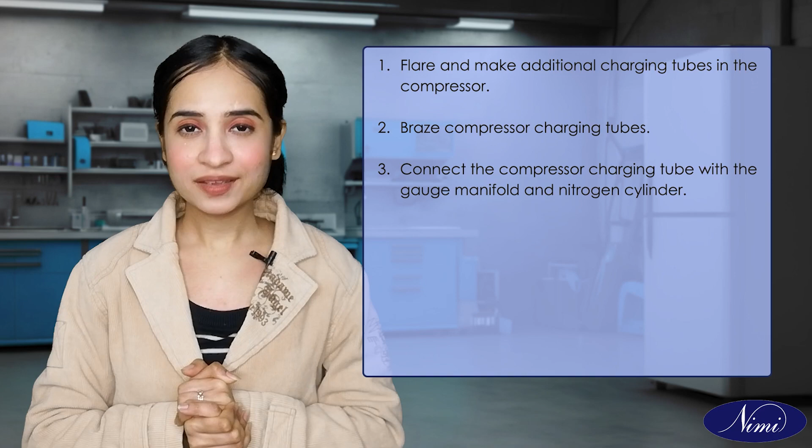In the last video, we discussed how to flare and make additional charging tubes in the compressor, braze the compressor charging tubes, connect the compressor charging tube with the gauge manifold and nitrogen cylinder, charge nitrogen gas into the system, test the leak with a soap solution, and braze the leak spots, then connect the system with a vacuum pump.

In continuation, in this video we are going to discuss how to do evacuation, gas charging, and finally pinching the copper tube. We will handle and operate the vacuum pump, dehydrate the system, evacuate the system on both the high and low sides, charge gas into the system, and pinch the system.

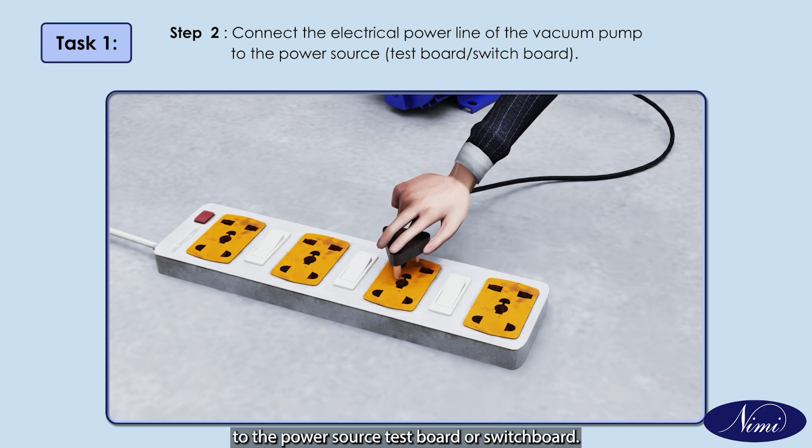Task 1: Handle and operate the vacuum pump. Step 1: Ensure that electrical power supply is available to the vacuum pump by using an online tester. Step 2: Connect the electrical power line of the vacuum pump to the power source, test board or switchboard. Step 3: Switch on the vacuum pump.

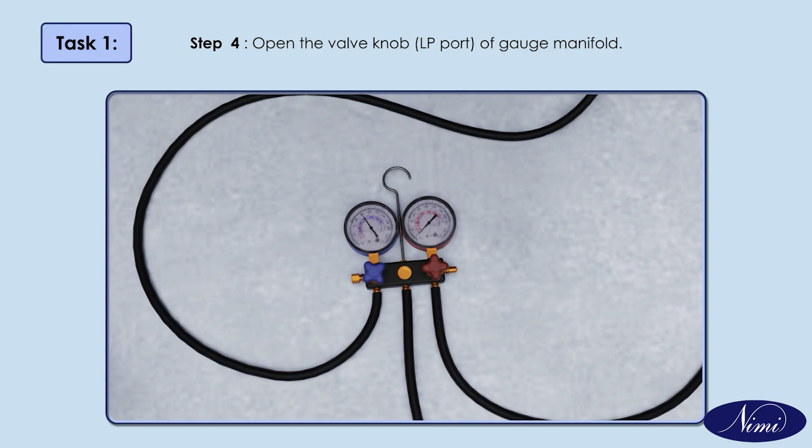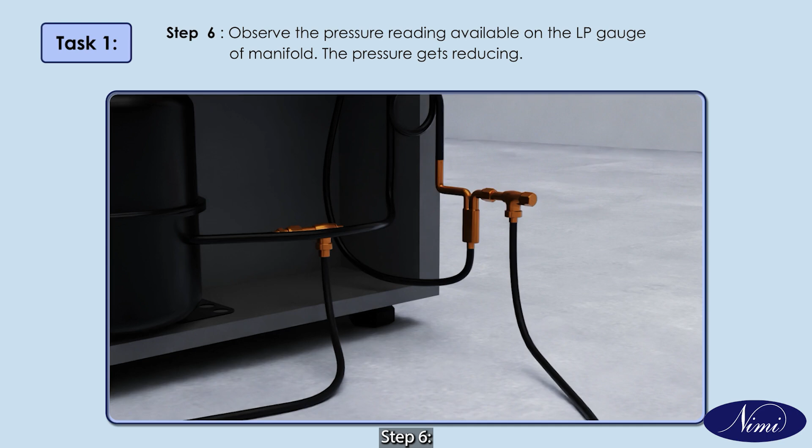Step 4: Open the valve knob of the LP port of the gauge manifold. Step 5: Open the angle valve by turning the stem anti-clockwise with a ratchet key or wrench. Step 6: Observe the pressure reading on the LP gauge of the manifold. The pressure gets reducing. Step 7: Leave the system as it is for 2 hours without any interruption.

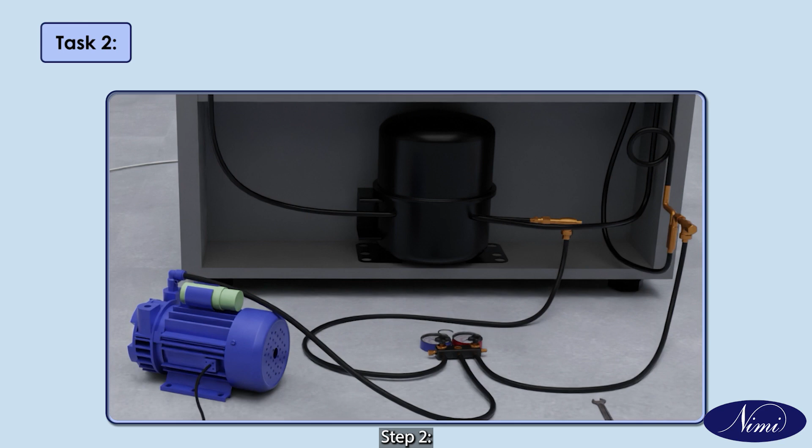Task 2: Dehydrate the system. Step 1: Take the heating kit infrared lamp and switch it on. Step 2: Make sure that the system is getting vacuum and the pump is functioning. Step 3: Heat all over areas of the system with the infrared lamp. Step 4: Apply heat uniformly to all areas.

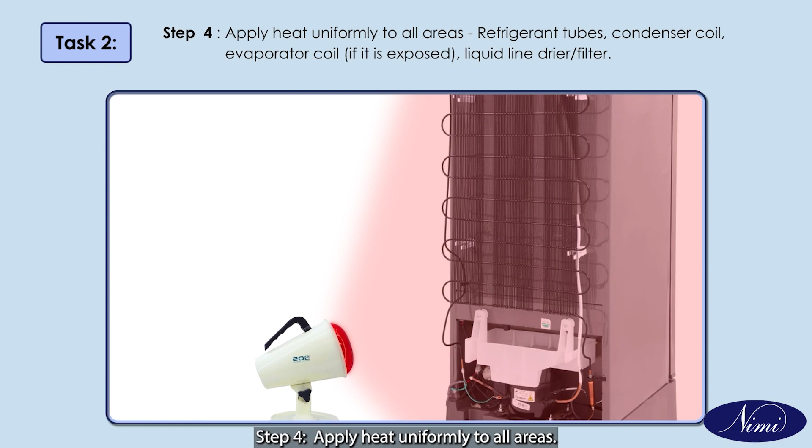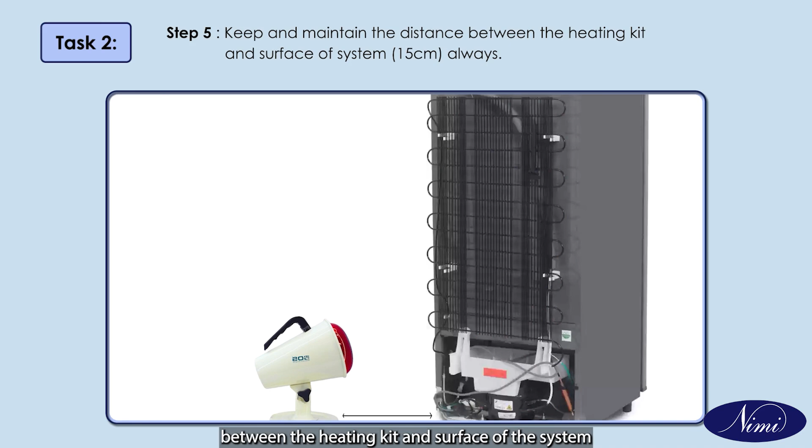Apply heat to the refrigerant tubes, condenser coil, evaporator coil if it is exposed, and liquid line drier or filter. Step 5: Keep and maintain the distance between the heating kit and the surface of the system at 15 cm always. Step 6: Continue the process for 15 to 30 minutes.

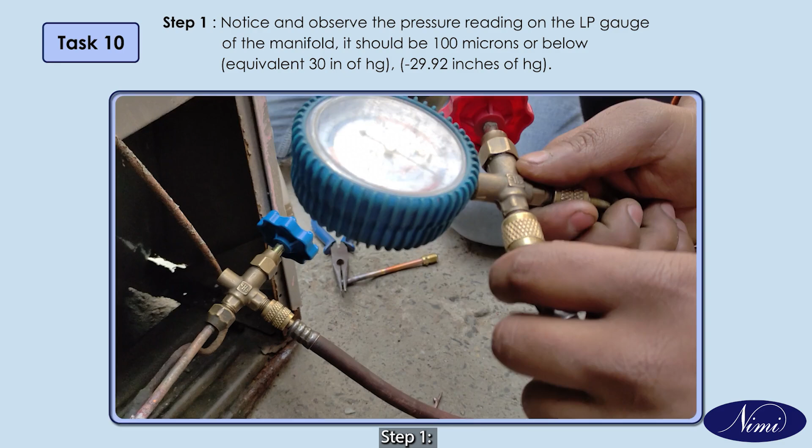Task 10: Evacuate the system. Step 1: Notice and observe the pressure reading on the LP gauge of the manifold. It should be 100 microns or below, equivalent to 30 inches of Hg.

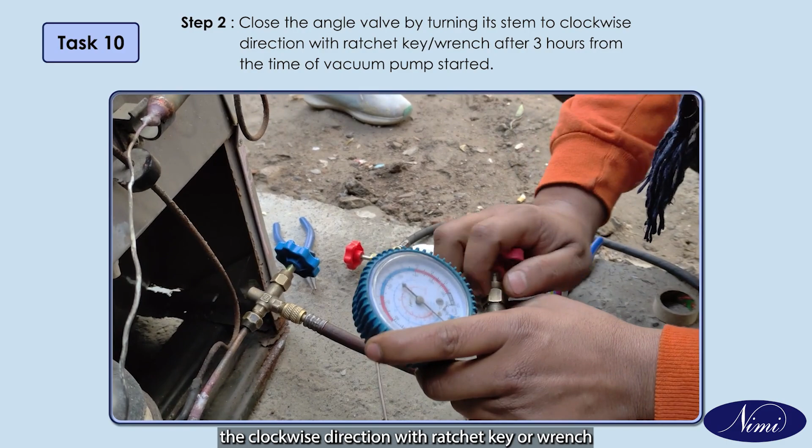Step 2: Close the angle valve by turning the stem clockwise with a ratchet key or wrench after 3 hours from the time the vacuum pump started. Step 3: Close the LP knob of the gauge manifold. Step 4: Switch off the vacuum pump and disconnect the power supply.

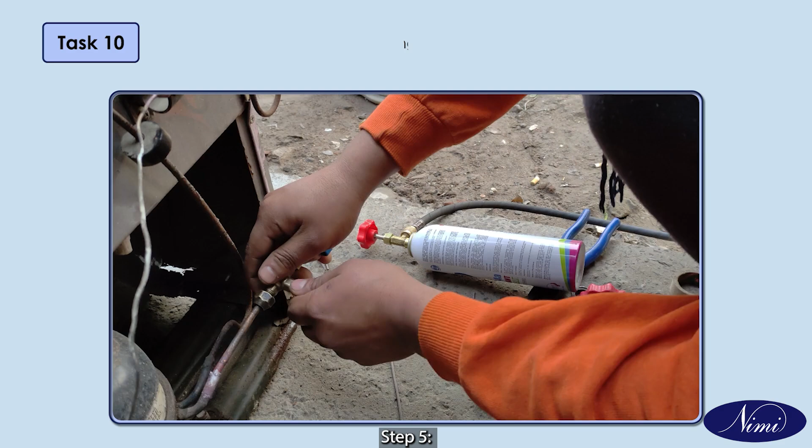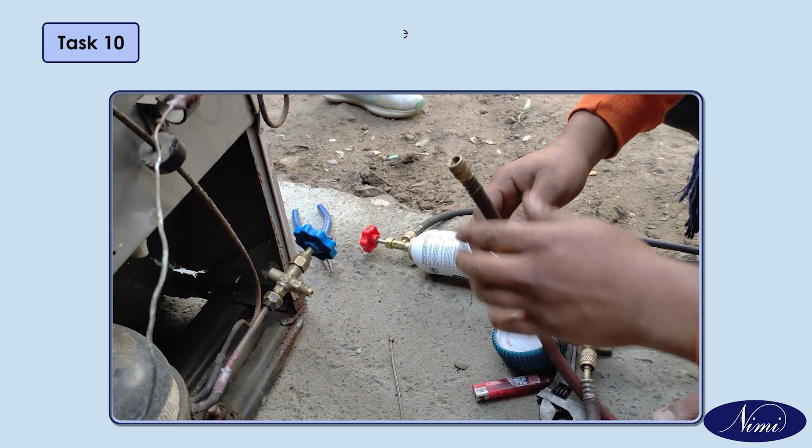Step 5: Disconnect charging hose 1 from the angle valve. Step 6: Close the outlet of the angle valve with a 6 mm dummy nut and tighten the nut with a suitable size double-ended spanner. Step 7: Disconnect charging hoses 1 and 2 from the gauge manifold and vacuum pump.

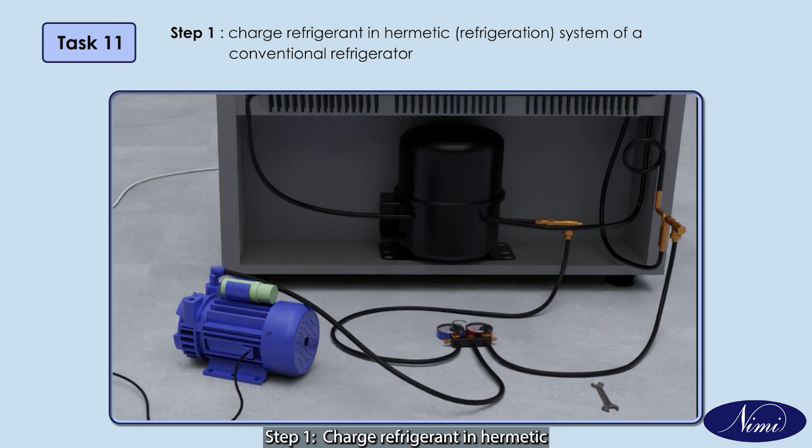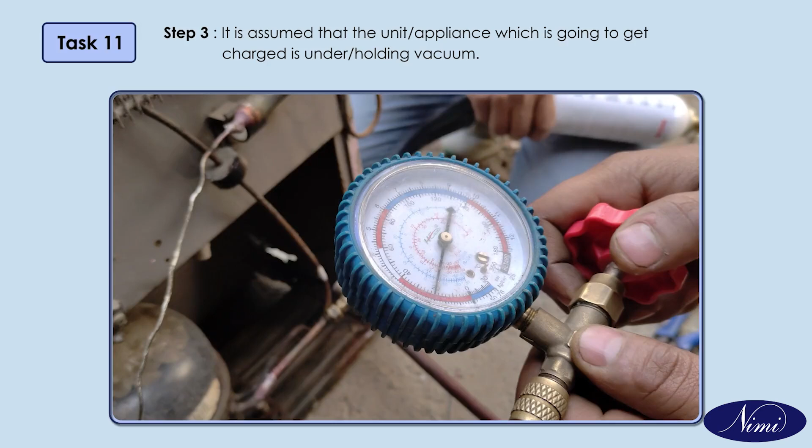Task 11: Gas charging the system. Step 1: Charge refrigerant in the hermetic refrigeration system of a conventional refrigerator. Step 2: Charge refrigerant in the hermetic refrigeration system of a frost-free refrigerator. Step 3: It is assumed that the unit or appliance to be charged is holding vacuum. Task 12: Connect the system to the charging cylinder.

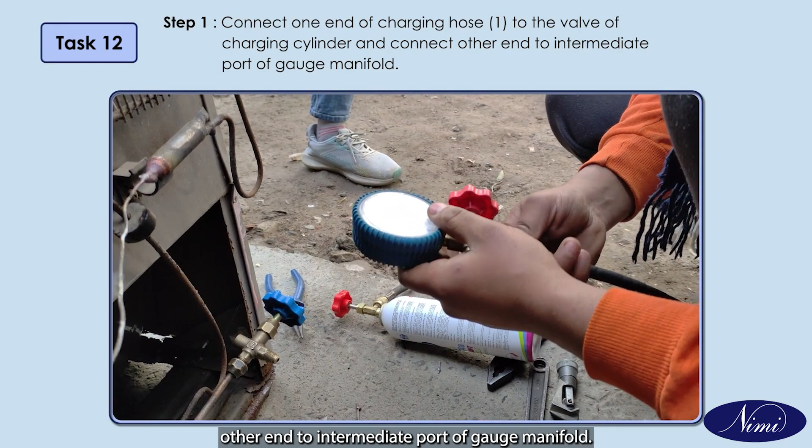Step 1: Connect one end of charging hose 1 to the valve of the charging cylinder and the other end to the intermediate port of the gauge manifold. Step 2: Connect one end of charging hose 2 to the angle valve of the compressor and the other end to the low pressure LP port of the gauge manifold.

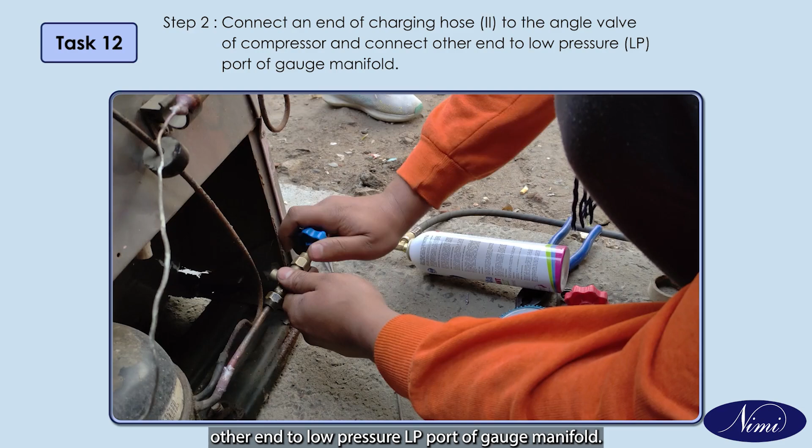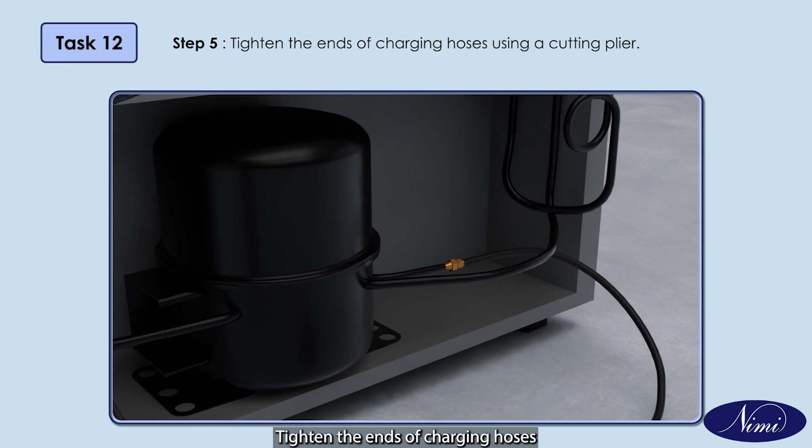Step 3: Close the high pressure HP port of the gauge manifold with a 6 mm flare dummy nut and tighten it using a suitable double-ended spanner. Step 4: Ensure that the charging cylinder valve, LP and HP valve knobs of the gauge manifold, and compressor angle valves are closed. Step 5: Tighten the ends of the charging hoses using a cutting plier.

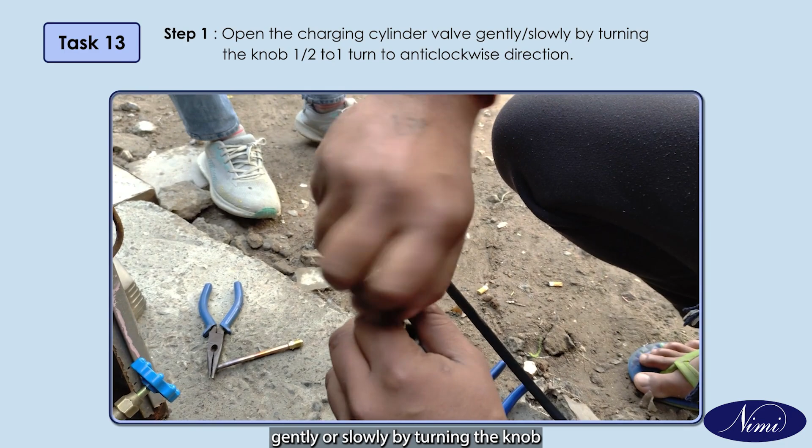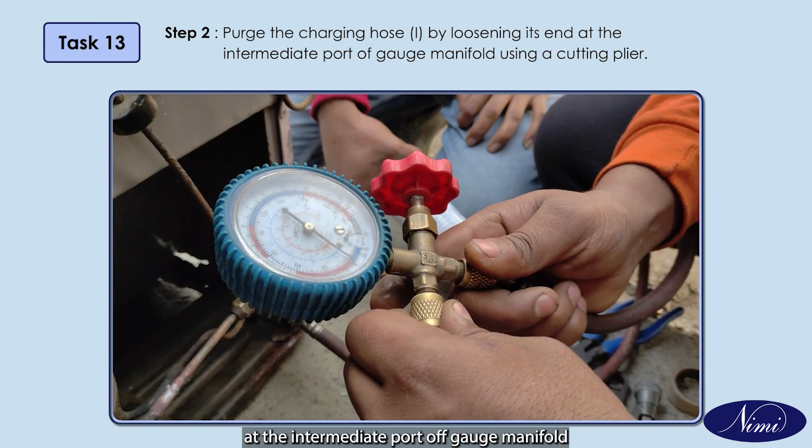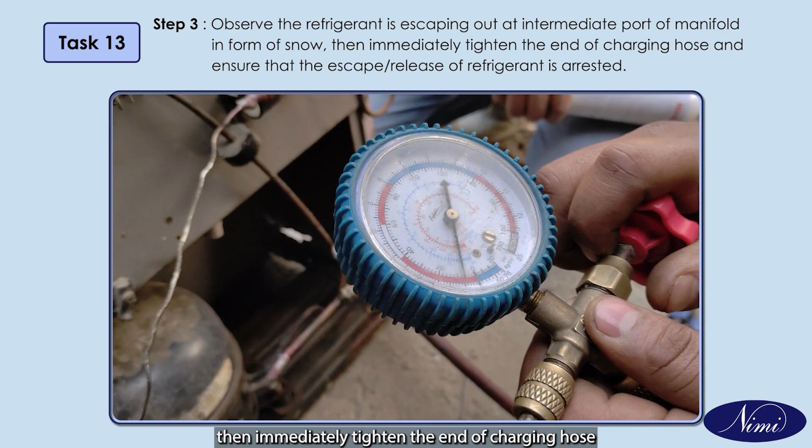Task 13: Purge air in the charging hoses. Step 1: Open the charging cylinder valve gently by turning the knob half to one turn anti-clockwise. Step 2: Purge charging hose 1 by loosening its end at the intermediate port of the gauge manifold using a cutting plier. Step 3: Observe the refrigerant escaping at the intermediate port in the form of snow, then immediately tighten the end of the charging hose to arrest the release of refrigerant. Step 4: Open the LP knob of the gauge manifold 2 to 3 turns and observe the reading on the LP gauge.

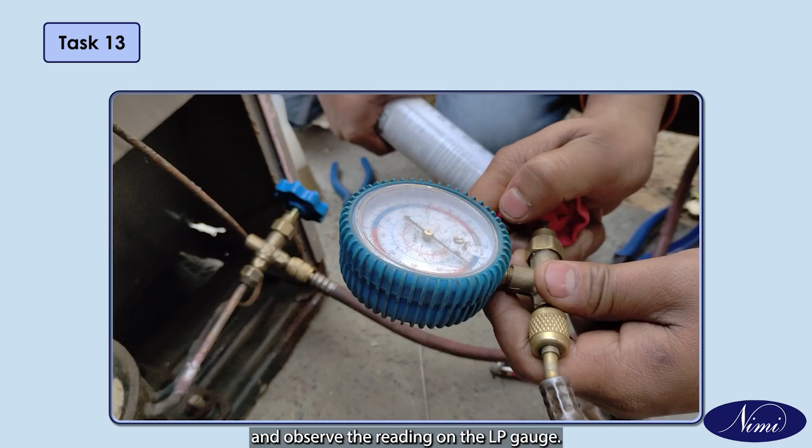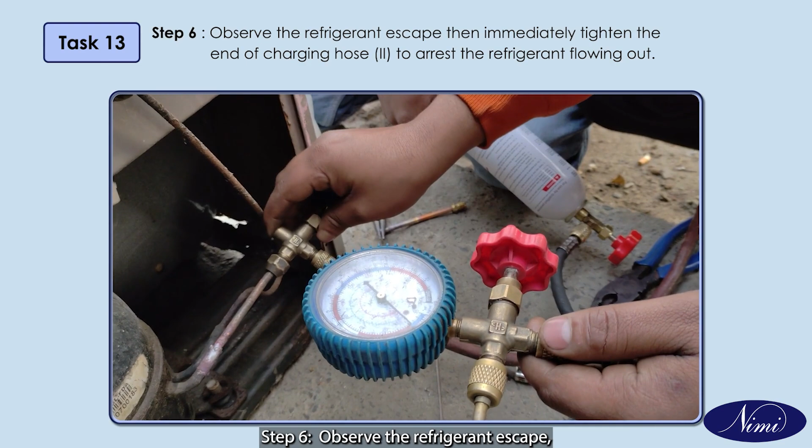Step 5: Purge charging hose 2 by loosening its end at the angle valve using a cutting plier. Step 6: Observe the refrigerant escape, then immediately tighten the end of charging hose 2 to arrest the refrigerant flowing out.

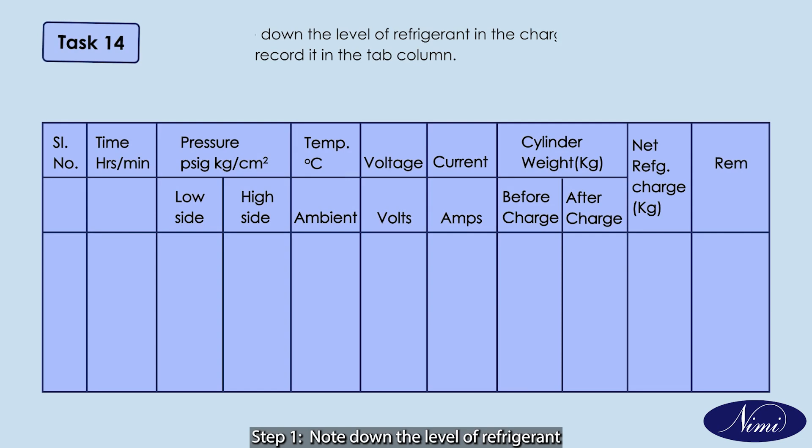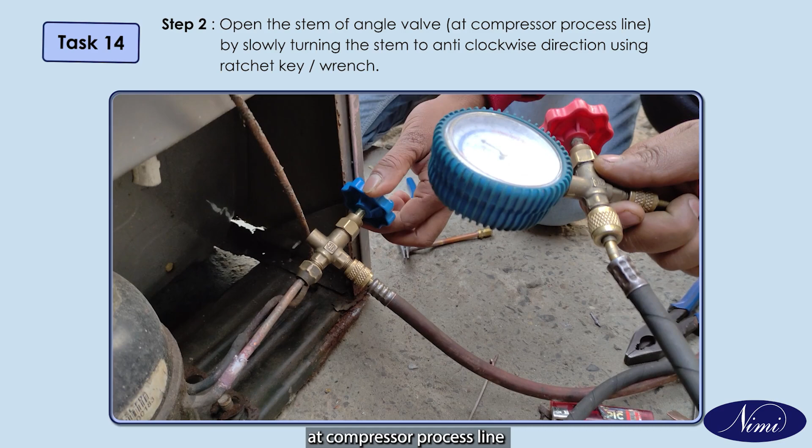Task 14: Charge refrigerant into the system. Step 1: Note down the level of refrigerant in the charging cylinder and record it in the tab column. Step 2: Open the stem of the angle valve at the compressor process line by slowly turning it anti-clockwise using a ratchet key or wrench.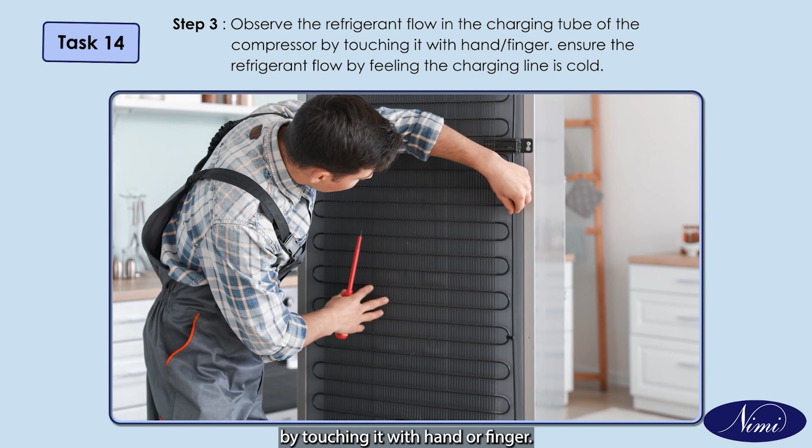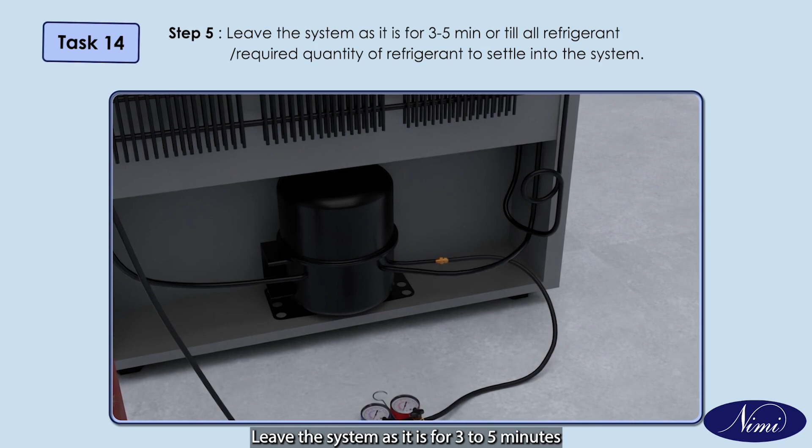Step 3: Observe the refrigerant flow in the charging tube of the compressor by touching it with the hand or finger, ensuring the refrigerant flow by feeling the charging line is cold. Step 4: Observe the refrigerant flow or transfer by watching the level in the charging cylinder. Step 5: Leave the system as it is for 3 to 5 minutes or until all refrigerant or the required quantity settles into the system.

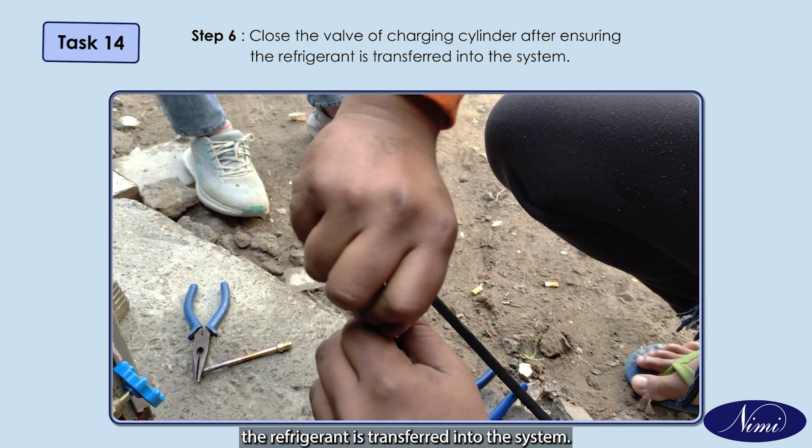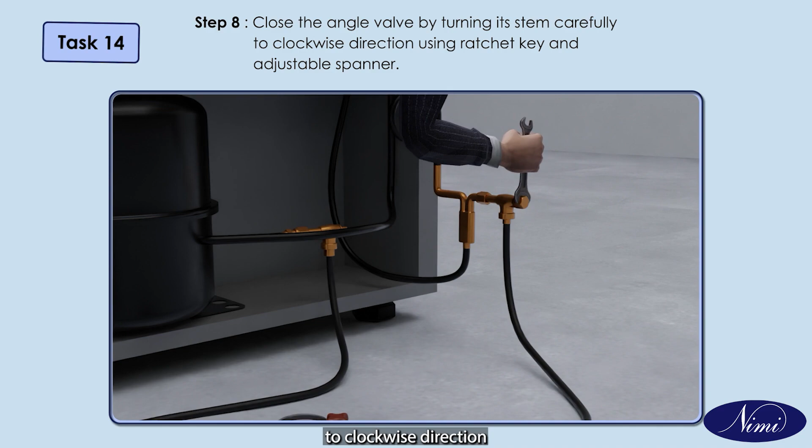Step 6. Close the valve of the charging cylinder after ensuring the refrigerant is transferred into the system. Step 7. Close the LP knob of the gauge manifold by turning the knob clockwise using hand. Step 8. Close the angle valve by turning its stem carefully clockwise using a ratchet key and adjustable spanner.

Step 9. Observe and record the reading on the charging cylinder to calculate the amount of refrigerant charged. Step 10. Disconnect charging hose 2 from the angle valve.

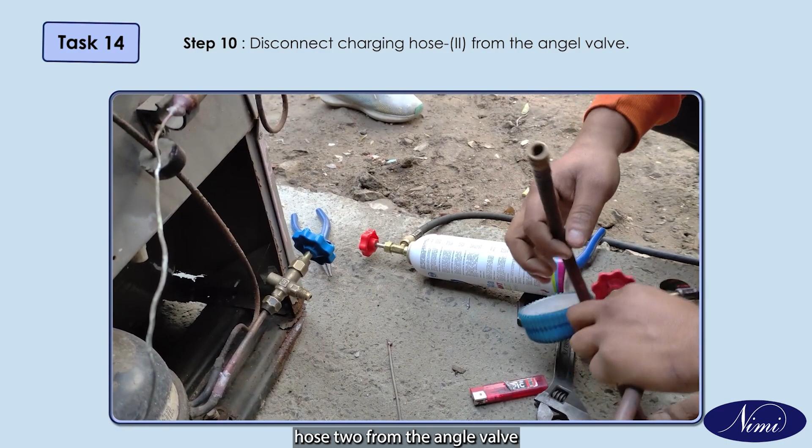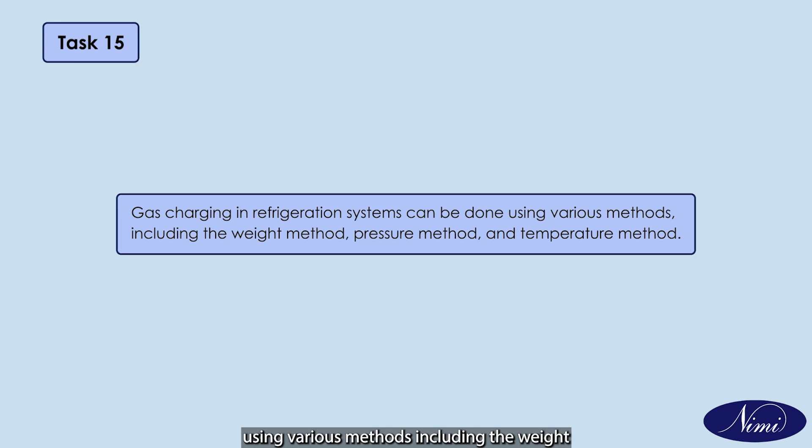Task 15. Connect system to service cylinder. Gas charging in refrigeration systems can be done using various methods including the weight method, pressure method, and temperature method.

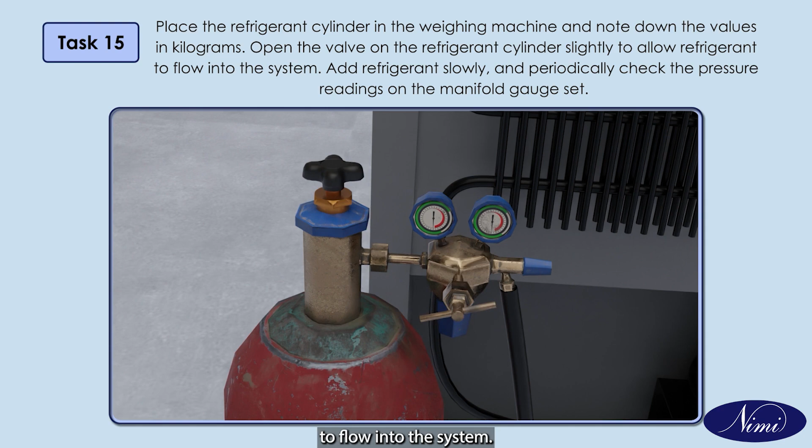Place the refrigerant cylinder on the weighing machine and note down the values in kilograms. Open the valve on the refrigerant cylinder slightly to allow refrigerant to flow into the system. Add refrigerant slowly and periodically check the pressure readings on the manifold gauge set.

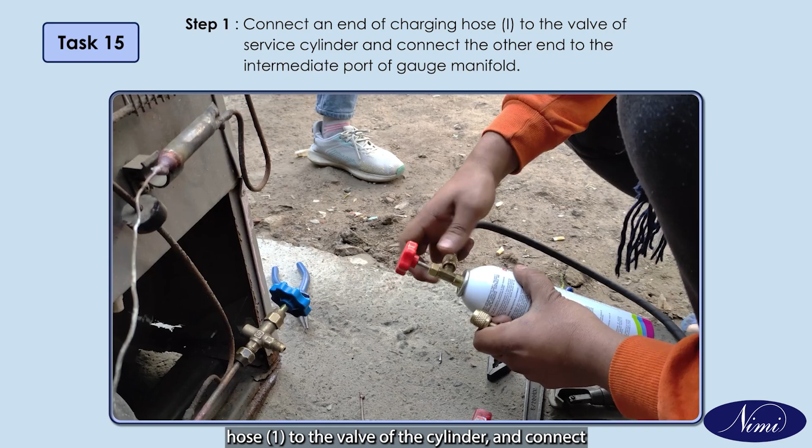Step 1. Connect one end of charging hose 1 to the valve of the service cylinder and connect the other end to the intermediate port of the gauge manifold. Step 2. Connect one end of charging hose 2 to the angle valve of the compressor and connect the other end to the low pressure LP port of the gauge manifold.

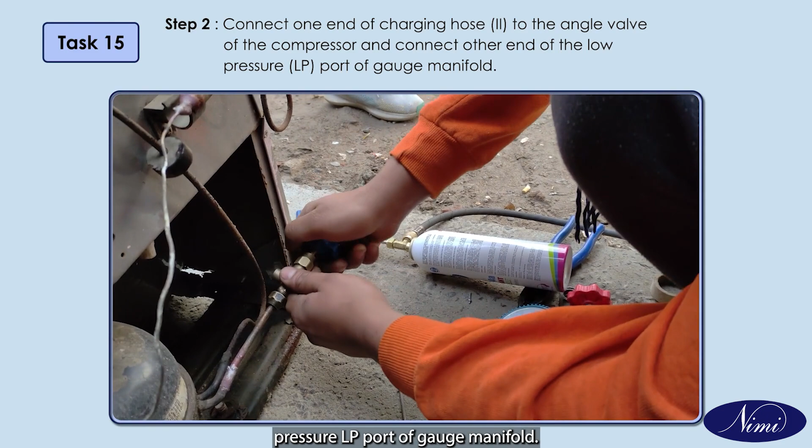Step 3. Close the high pressure HP port of the gauge manifold with a flare dummy nut of 6 mm and tighten it using a suitable double-ended spanner.

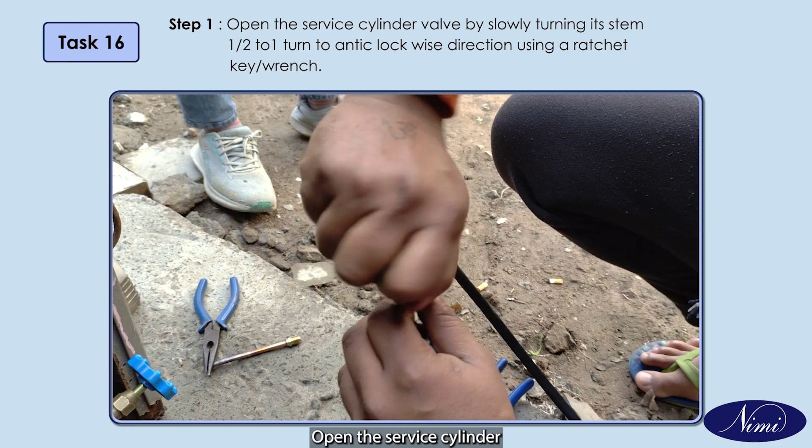Task 16. Purge air in the charging hoses. Step 1. Open the service cylinder valve by slowly turning its stem 1/2 to 1 turn in the anti-clockwise direction using a ratchet key or wrench.

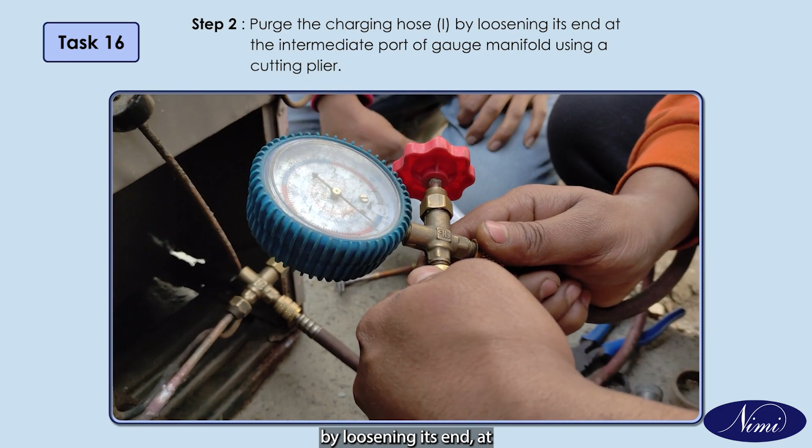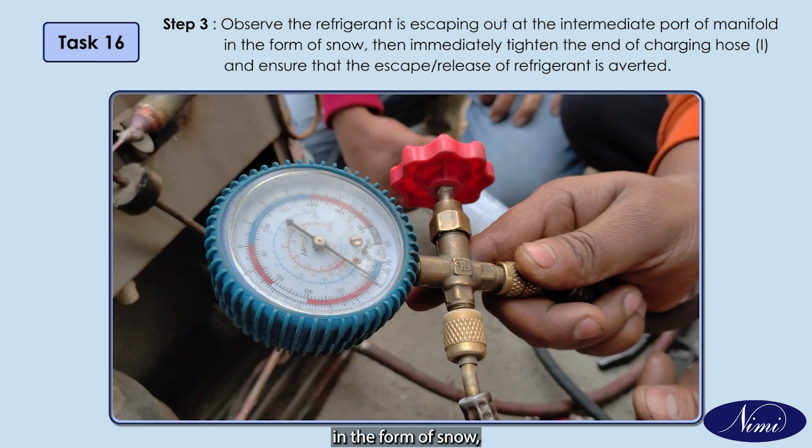Step 2. Purge charging hose 1 by loosening its end at the intermediate port of the gauge manifold using a cutting plier. Step 3. Observe the refrigerant escaping at the intermediate port of the manifold in the form of snow. Then immediately tighten the end of charging hose 1 and ensure the escape or release of refrigerant is averted.

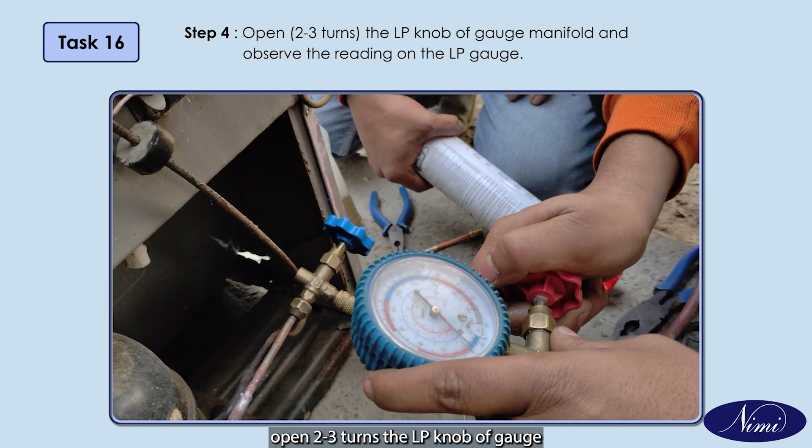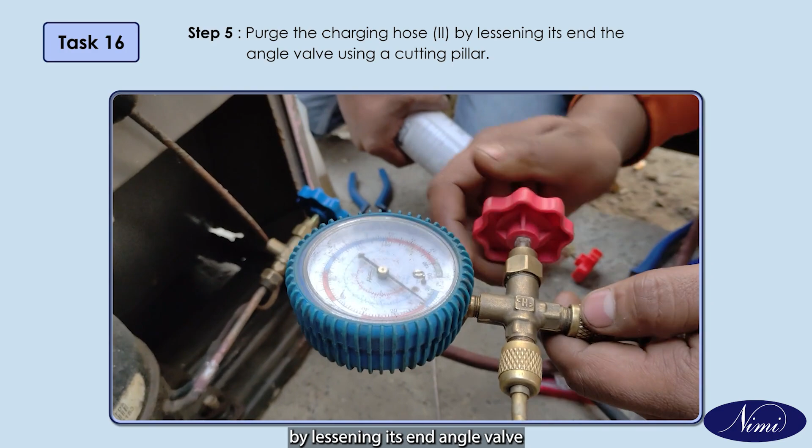Step 4. Open the LP knob of the gauge manifold 2 to 3 turns and observe the reading on the LP gauge. Step 5. Purge charging hose 2 by loosening its end at the angle valve using a cutting plier. Step 6. Observe the refrigerant escape, then immediately tighten the end of charging hose 2 to arrest the refrigerant flowing out.

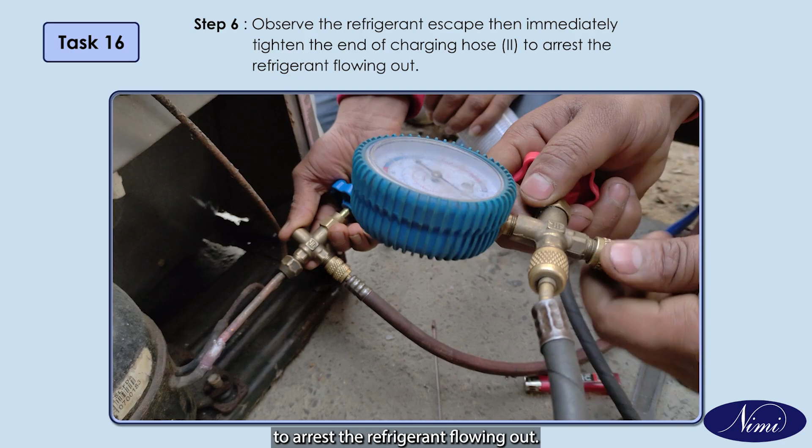Hydrocarbon gases have a wide flammable range, meaning they can ignite at relatively low concentrations in the air. Even a small leak or accidental release of hydrocarbon gas in a confined space like a refrigerator could create a potentially hazardous situation.

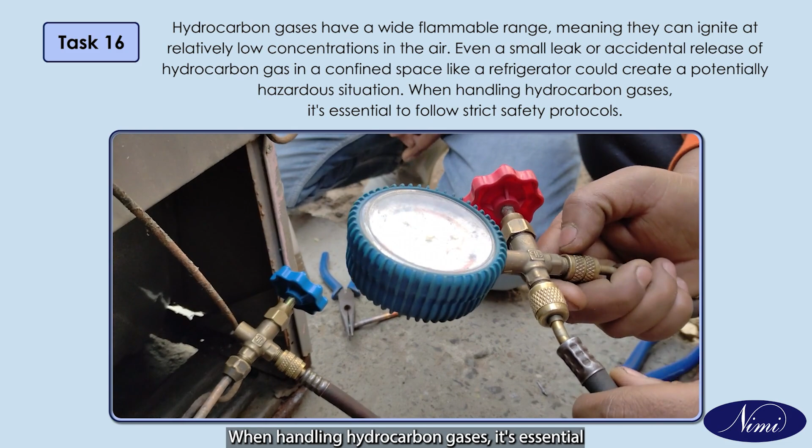When handling hydrocarbon gases, it's essential to follow strict safety protocols. Task 17. Charge refrigerant into the system.

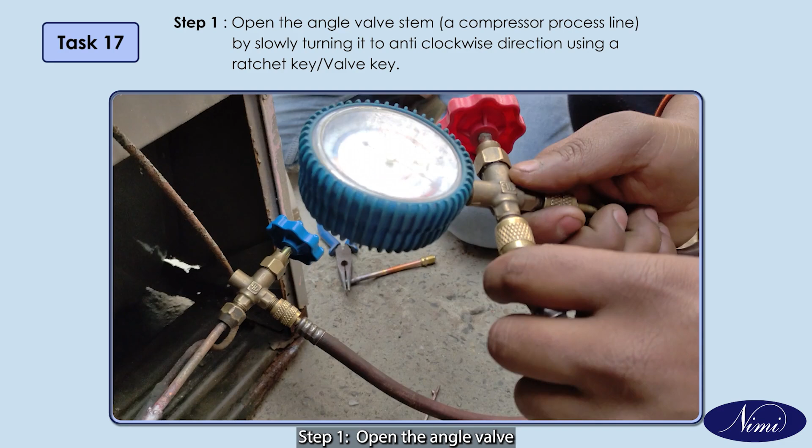Step 1. Open the angle valve stem at the compressor process line by slowly turning it in the anti-clockwise direction using a ratchet key or valve key.

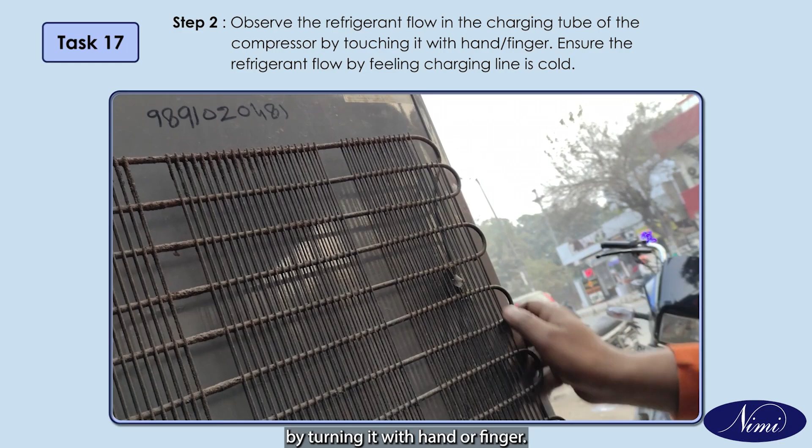Step 2. Observe the refrigerant flow in the charging tube of the compressor by touching it with hand or finger. Ensure the refrigerant flow by feeling the charging line is cold. Step 3. Observe the refrigerant flow also in the LP gauge of the manifold. The pressure is increasing from vacuum level -30 inHg to above 0 psig onwards.

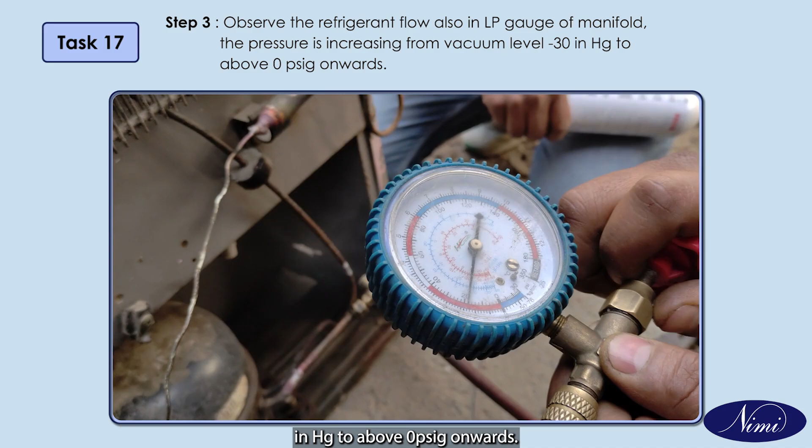Step 4. Observe the hissing noise into the compressor as the pressure increases from vacuum to above 0 level. It indicates the vacuum is broken.

Step 5. Allow the refrigerant to flow till it reaches 30 to 50 psig in the LP gauge of the manifold. Then immediately close the angle valve.

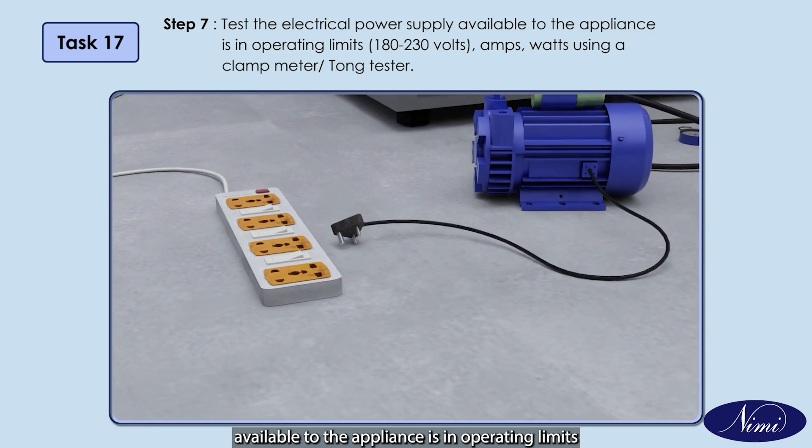Step 6. Ensure that the wiring of the system or appliance is ready for switch on using the wiring diagram. Step 7. Test the electrical power supply available to the appliance is within operating limits, 180 to 230 volts, amperes, and watts, using a clamp meter or Tong tester.

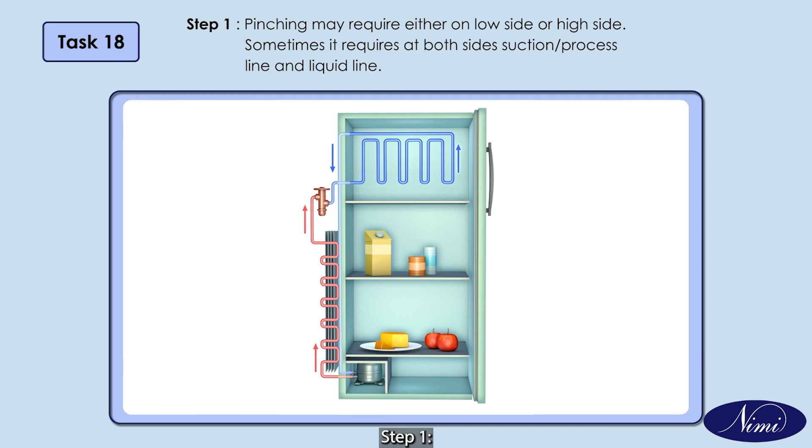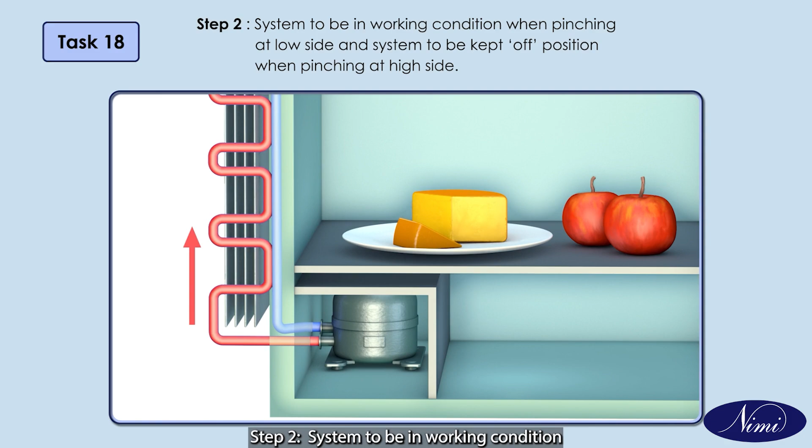Step 2. The system should be in working condition when pinching at the low side, and kept in the off position when pinching at the high side.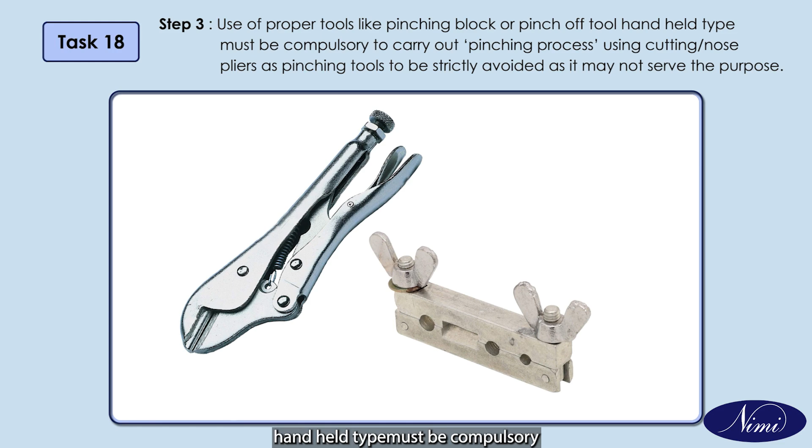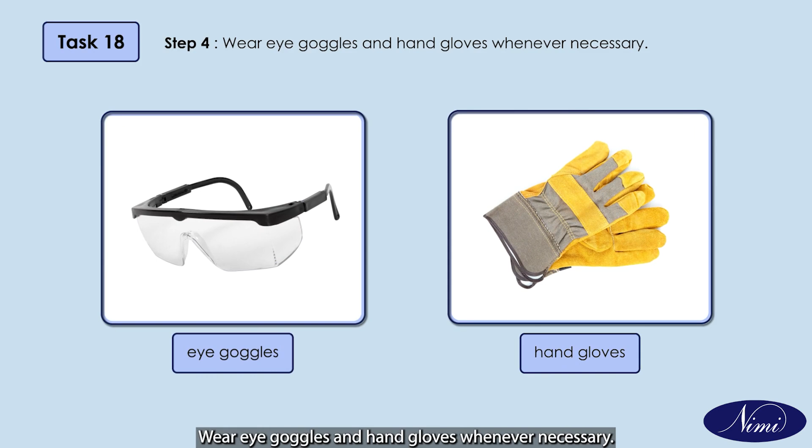Step 3. Use of proper tools like a pinching block or handheld pinch-off tool must be compulsory to carry out the pinching process; using cutting or nose pliers as pinching tools must be strictly avoided as it may not serve the purpose. Step 4. Wear eye goggles and hand gloves whenever necessary.

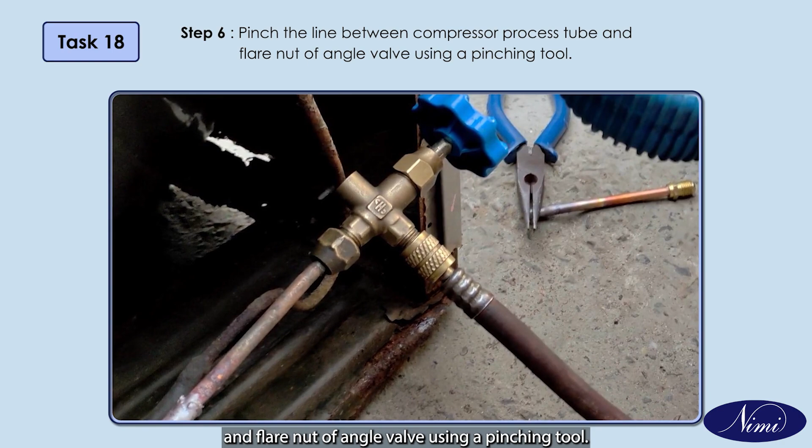Step 5. Ensure that the compressor is working. Step 6. Pinch the line between the compressor process tube and flare nut of the angle valve using a pinching tool. Step 7. Hold the pinching tool tightly on the process line.

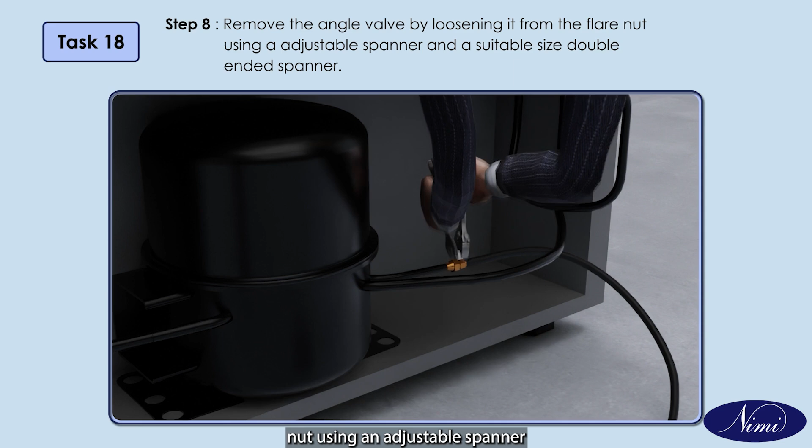Step 8. Remove the angle valve by loosening it from the flare nut using an adjustable spanner and a suitable size double-ended spanner. Step 9. Cut the copper tube between the flare nut and the pinching point using a tube cutter.

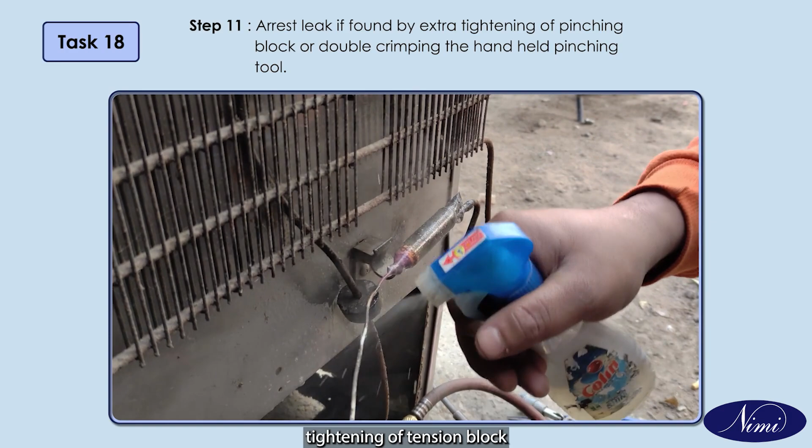Step 10. Test for leaking refrigerant at the open end of the copper tube beyond the pinching point by applying a thin film of soap solution to the open end. Step 11. Arrest the leak, if found, by extra tightening of the pinching block or double crimping the handheld pinching tool.

Once charging is completed, monitoring temperature, current, voltage, and pressure helps ensure that the refrigerator's cooling system is operating within its designed parameters.